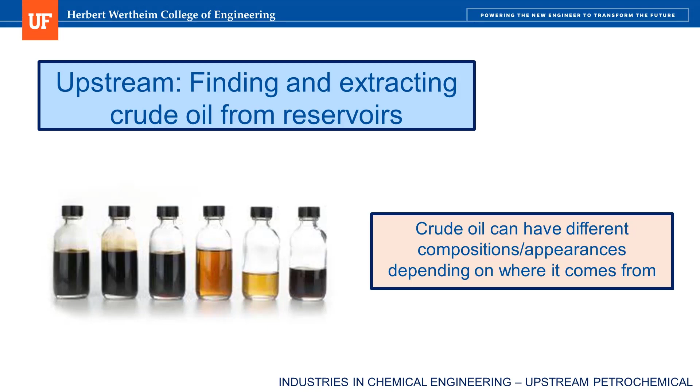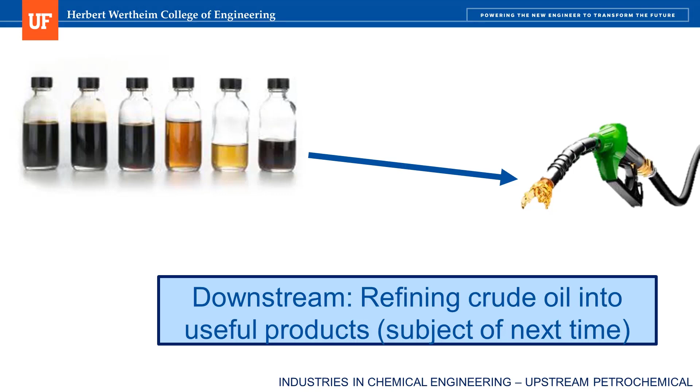Interestingly, but perhaps not surprisingly, crude oil can look and behave differently depending on where it comes from. Therefore, chemical engineers have the challenge of producing a consistent product from an inconsistent raw material. The downstream petrochemical industry will be the subject of a future episode, and the focus there is refining that crude oil into gasoline and other chemical products.

The first question of the petrochemical industry is where. It's bad practice to indiscriminately drill holes in the Earth's surface without prior knowledge of how much oil exists in the reservoir, if any at all. To answer this question, petrochemical companies have entire teams dedicated to exploration, which consists of engineers, geologists, and others. A popular method is using a computer model to predict the location and composition of the oil ahead of time, such that the company can project the expected profit of drilling in a particular location.

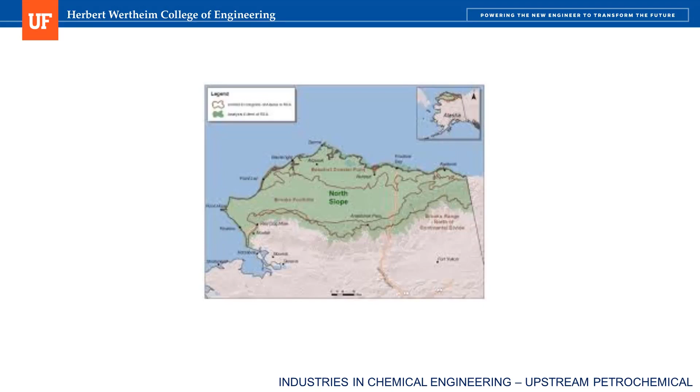One of my good friends from college was stationed on the North Slope in Alaska when he worked for ExxonMobil, and he would tell me that he'd frequently see polar bears while performing his job. Although I have to be honest and say that I'm not sure if this is true or not. Regardless, he really enjoyed the opportunity to travel and see such a remote location that few others have the opportunity to see.

I'm going to focus on the location closest to our home state of Florida, which is in the Gulf of Mexico. This map is a little outdated, but it shows the locations and sizes of offshore drilling rigs. Notice that they're mostly off the shore of Texas, Louisiana, Mississippi, and Alabama. I'm not aware of many oil rigs near Florida, and I'm not sure why, but my speculation is that there's concern for our beaches and tourism.

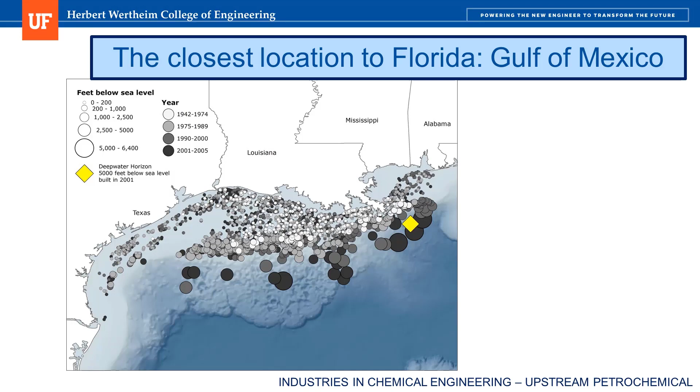Another observation to make here is that larger rigs tend to be further offshore, possibly because it's harder to drill in deeper water. So rigs out this far have to produce more oil in order to be worth it economically. This brings me to the second question that chemical engineers must ask. The oil is located in Earth's surface, which can be approximately 1 mile below the water surface. How can we get down there?

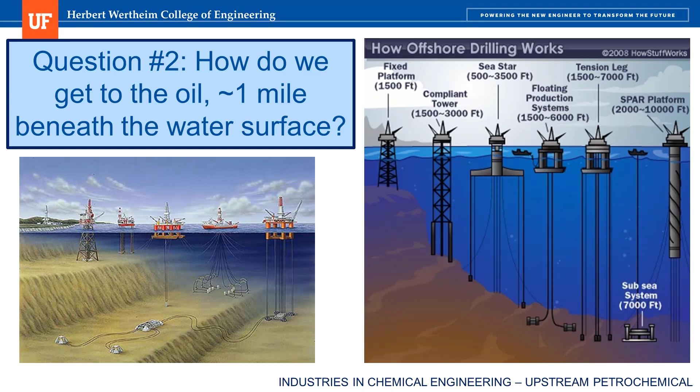I've always been intrigued by the names of these platforms. Perdido is Spanish for lost, possibly owing to how remote it is. I'm not sure if I'd want to work on something named Lost. From the oil rig on the water surface, we next need a way to transport oil from the hole to the surface. This can be done by assembling a drill string.

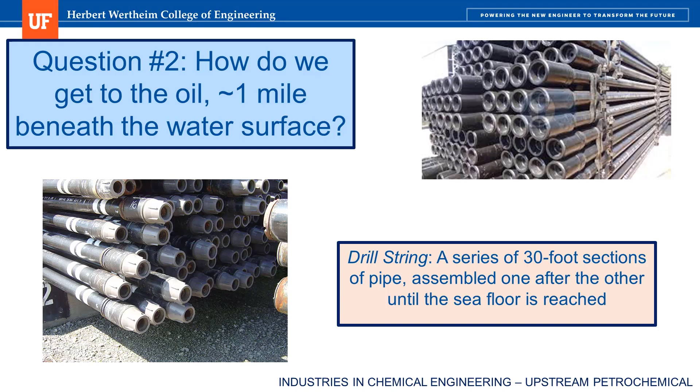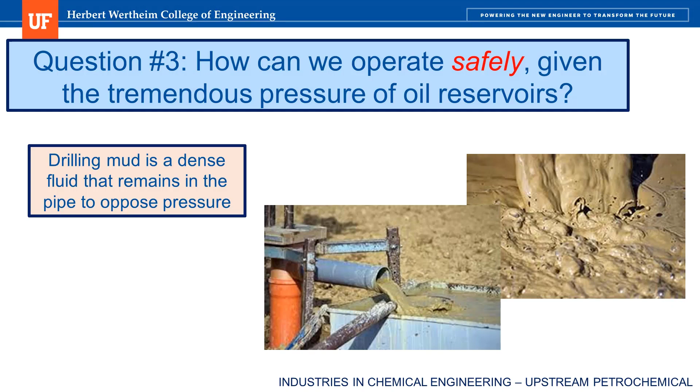In 30-foot sections, pipe is assembled and lowered to the sea floor in stages. A third question, and without a doubt the most important question in all of chemical engineering, is how can we operate safely? One of the specific hazards of this industry is the tremendous pressure inside the oil reservoir. To counter this pressure, the pipe is filled with a dense substance called drilling mud. The height of the column of drilling mud in the pipe is enough to resist the pressure inside the reservoir.

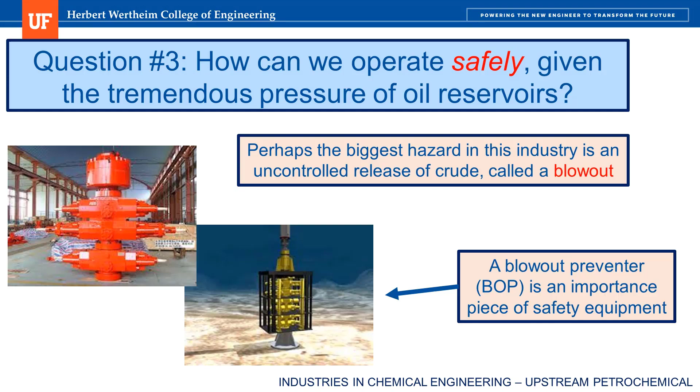The term for an uncontrolled release of crude is a blowout, which can occur if the pressure isn't accounted for properly. An aptly named piece of safety equipment that prevents blowouts is called the blowout preventer, or BOP for short. By the way, if you talk to an engineer or anybody who works in the petrochemical industry, expect them to use plenty of acronyms and jargon. It can sometimes feel like they speak a completely different language. Just expect this, don't feel inadequate, and don't be afraid to ask them to explain their terms.

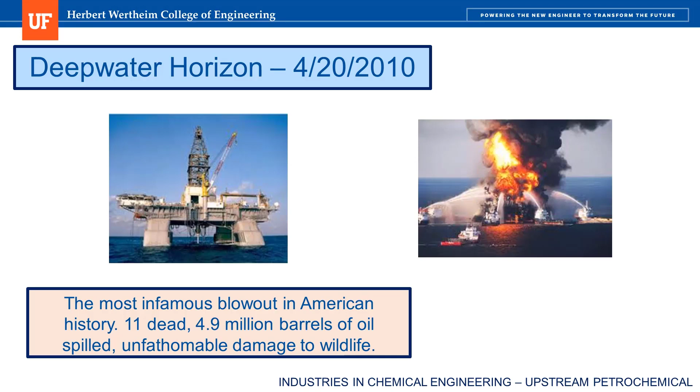The Deepwater Horizon incident was adapted into a 2016 movie starring Mark Wahlberg. While it is only a dramatization, I personally think it should be required viewing for all chemical engineers. This incident is a solemn reminder of the pledge that we must take as engineers to resist the temptation to ignore warning signs and cut corners, and instead choose to hold paramount the protection of health and safety of society above all else.

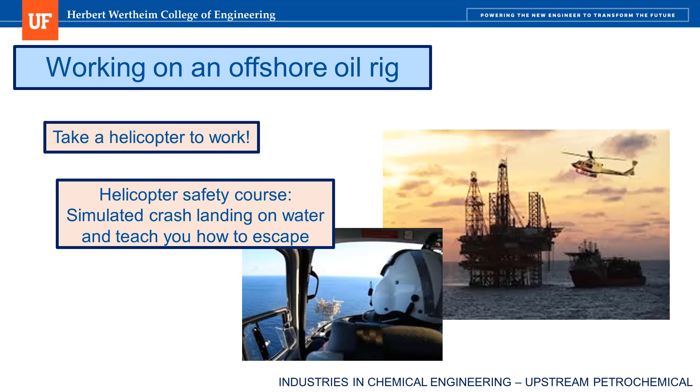The lifestyle of working on an offshore drilling rig is certainly unique. You may have been wondering how you even get there, and the answer to that is, of course, by helicopter. Here again, safety is of the utmost importance. In the event of a water landing, helicopters are prone to flipping upside down because of the weight of the rotors. Petrochemical companies have helicopter safety training courses that involve an actual helicopter and a huge swimming pool. When I was in college, I had the opportunity to complete this training. Even though it was only a simulation, the adrenaline rush of being flipped upside down was unforgettable.

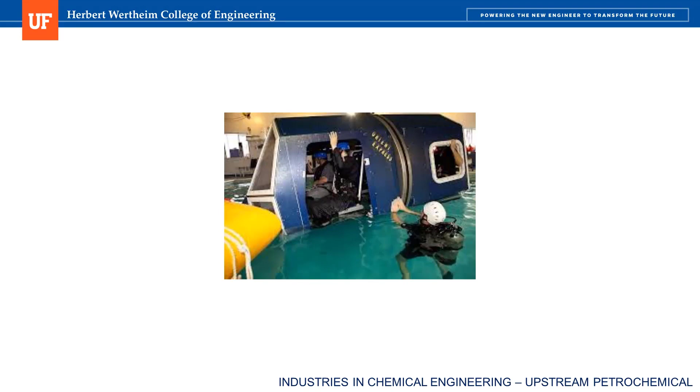Something else that stuck with me was the attention and reverence that companies like ExxonMobil and Shell have for safety. Even though flying in a helicopter might be terrifying for some, the safety protocols and planning that are in place are very reassuring, and you should feel safe working for these companies.

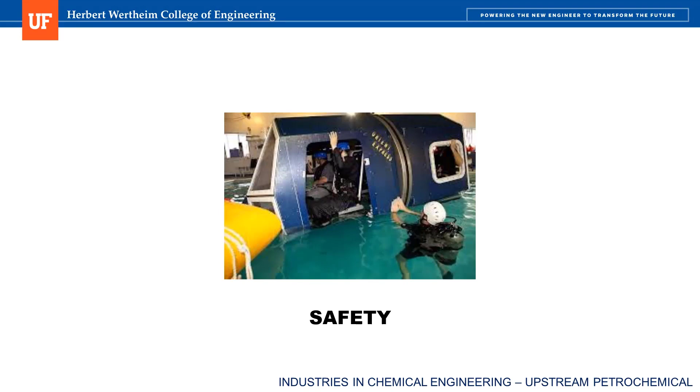A common scheduling arrangement is to live and work continuously on the rig for 2 weeks at a time. This may sound grueling, but this schedule is coupled with 2 weeks off after that. Another benefit is the high salary of these types of jobs. This is a very popular arrangement for young chemical engineers who may not have family obligations just yet and wish to travel the world, both as part of their job and as part of their extended free time.